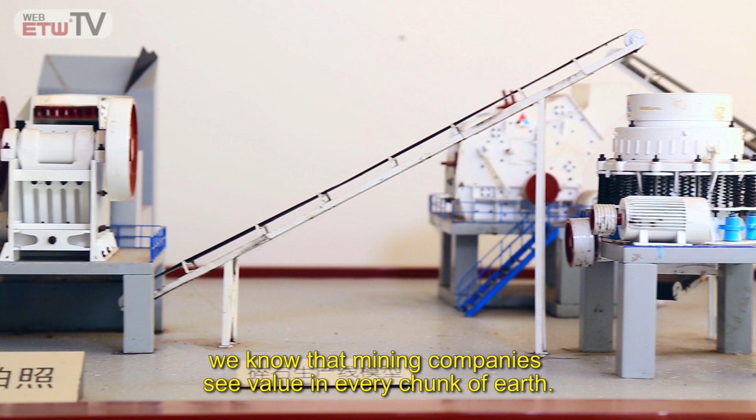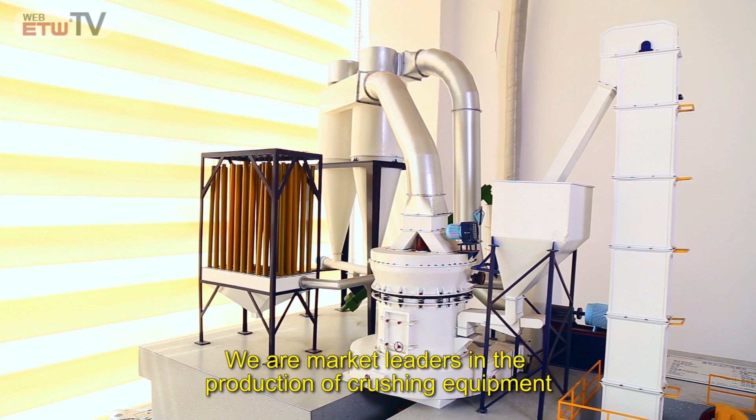At Dingbo Heavy Industry Machinery, we know that mining companies see value in every chunk of earth. That's why we've made it our goal to help you get the most out of your raw materials at the lowest production costs. We are market leaders in the production of crushing equipment and grinding mills in Shanghai.

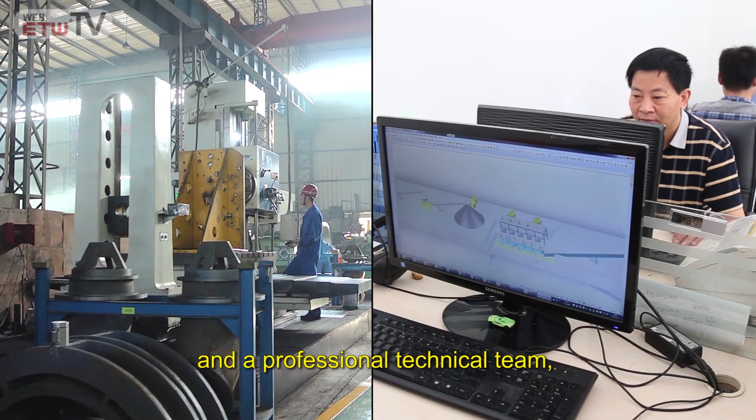With a 230,000 square meter manufacturing facility equipped with state-of-the-art metal cutting machine tools and a professional technical team, we can produce an annual output value of up to $50 million US.

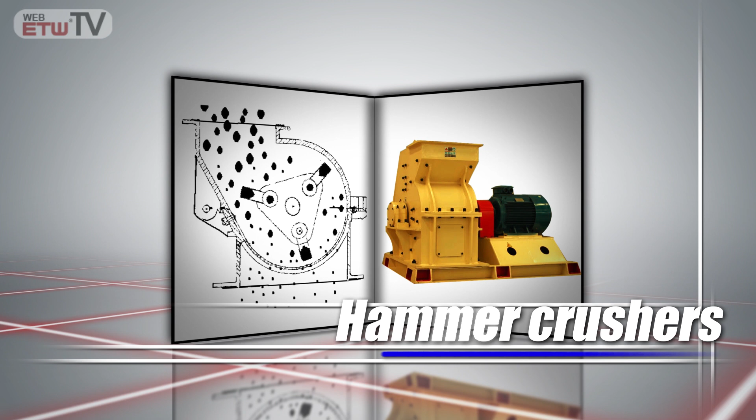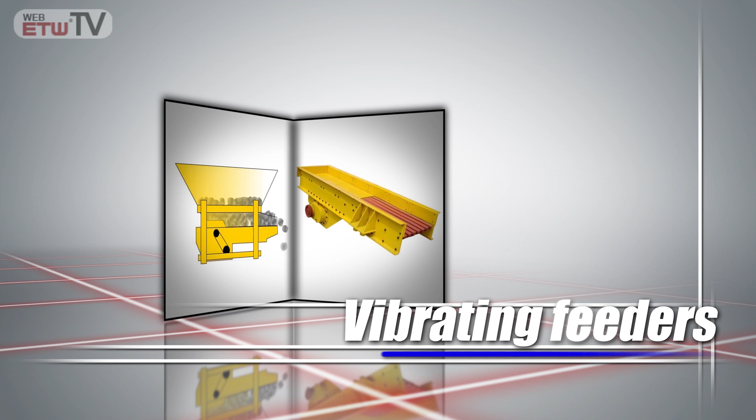Dingbo's product line includes coarse powder mills, jaw crushers, impact crushers, cone crushers, hammer crushers, sand making machines, vibrating screens, vibrating feeders, sand washers, and belt conveyors, among others.

Since 2004, Dingbo has attained both CE and ISO 9001-2000 certification. We have achieved patents for coarse powder mills, reversible fine crushers, roller presses, and other products, but also won the title of Top 10 Grinding Mills in Chinese Industry.

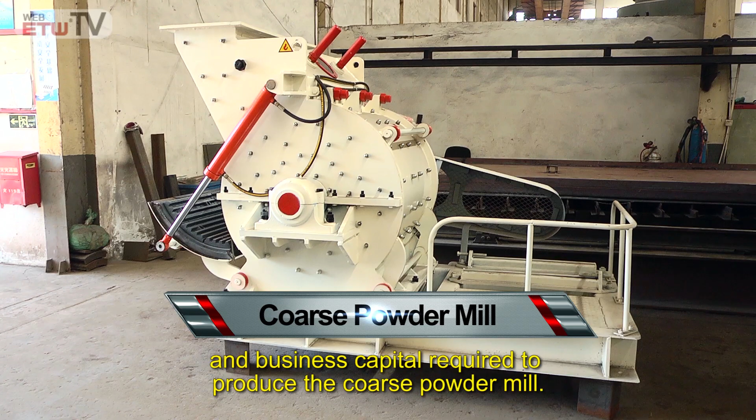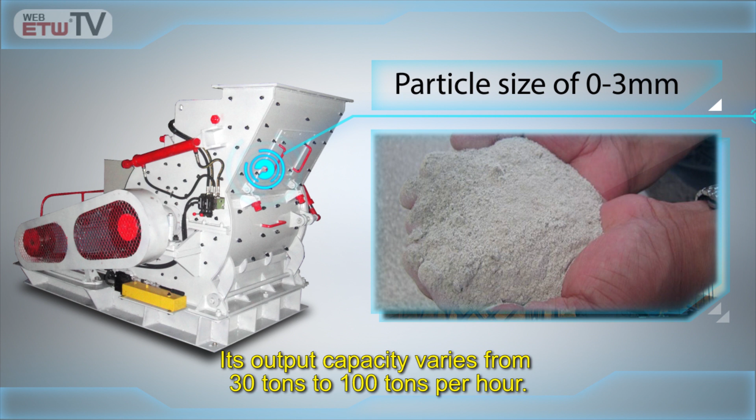In Shanghai, we are the only firm that possesses the technology and business capital required to produce the coarse powder mill. As our patented product, this machine is used for processing coarse powder with a particle size of 0 to 3 millimeters. Its output capacity varies from 30 tons to 100 tons per hour. The entire machine is constructed in full compliance with European standards.

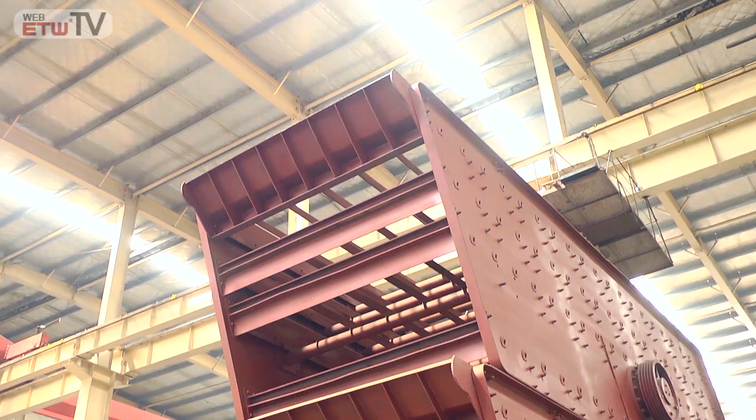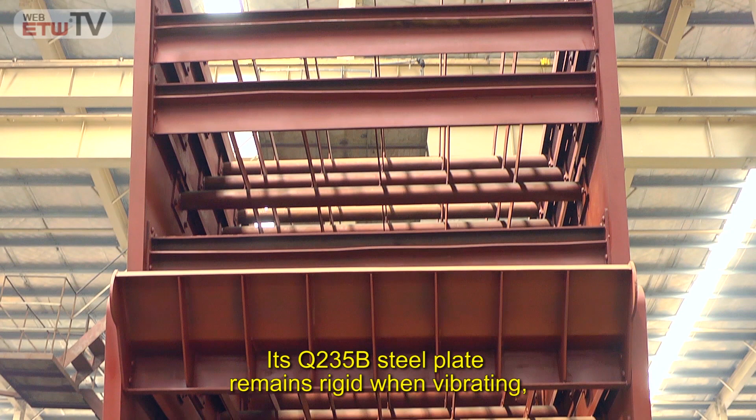Our vibrating screen is equipped with a Siemens motor for stable operation and reduced energy consumption. Its Q235B steel plate remains rigid when vibrating, thus extending the lifespan of our equipment. In addition, this product has been coated 4 times, which provides extremely strong resistance to rust outdoors and also increases its service life.

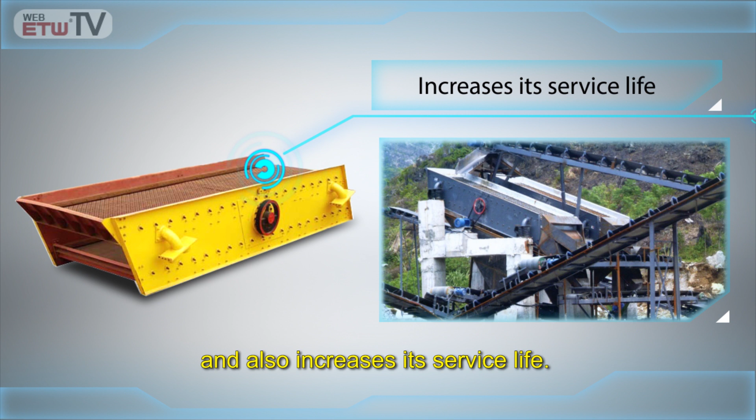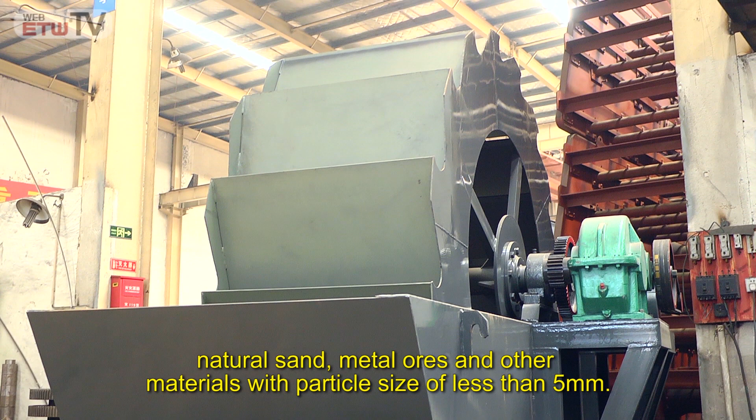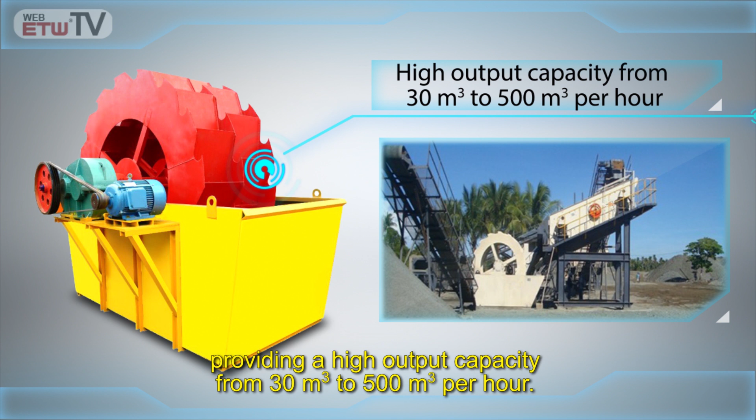The wheel sand washer can perform washing on artificial sand, natural sand, metal ores, and other materials with particle size of less than 5 millimeters. It is mainly used to wash dust, sludge, and so on. This equipment works efficiently, providing a high output capacity from 30 meters cubed to 500 meters cubed per hour.

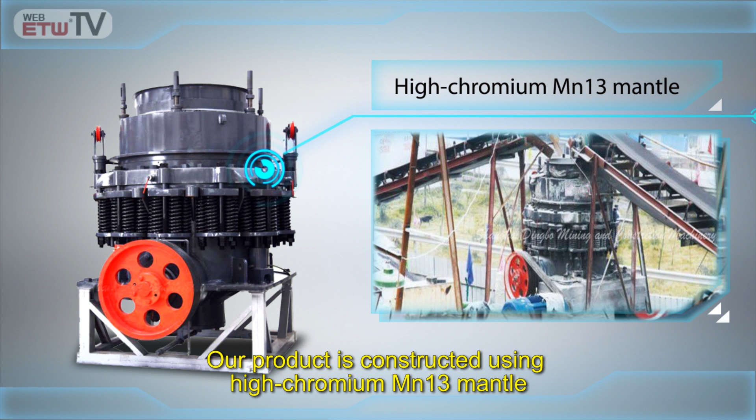This series of machine is mainly used to crush high-hardness rock, ores, and other materials. Its output capacity ranges from 30 tons to 80 tons per hour. Our product is constructed using high chromium Mn13 mantle to achieve an extremely high wear resistance.

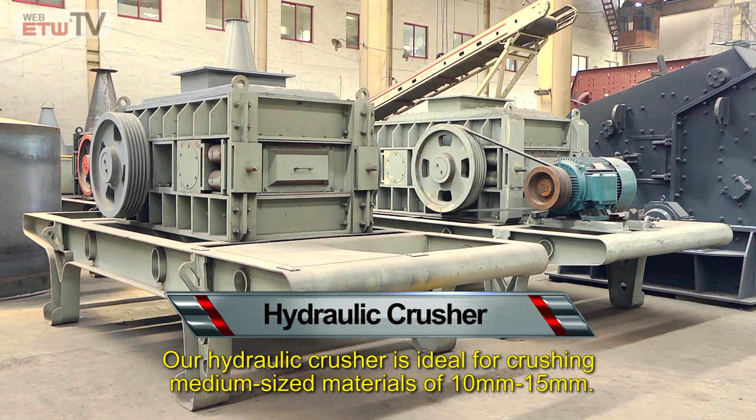Our hydraulic crusher is ideal for crushing medium-sized materials of 10 to 15 millimeters. It allows the size of the discharge gate to be automatically regulated so as to achieve uniform granularity of the finished products. This equipment is usually applied in the secondary crushing process.

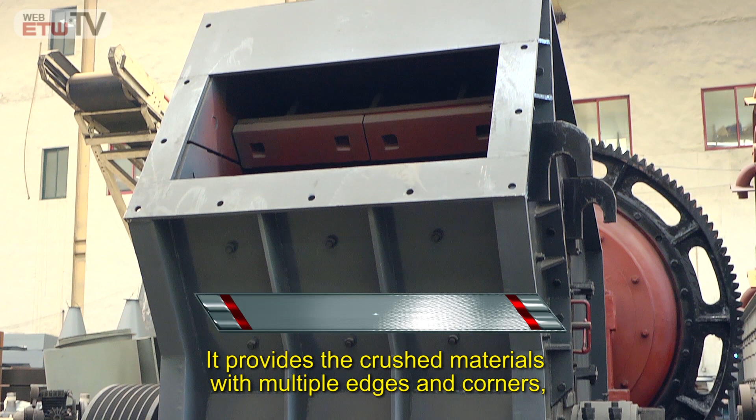It provides the crushed materials with multiple edges and corners, which conforms to the standard for construction of highways, buildings, and bridges, etc. Its rear cover can be opened by a hydraulic device, allowing the worn parts to be conveniently replaced.

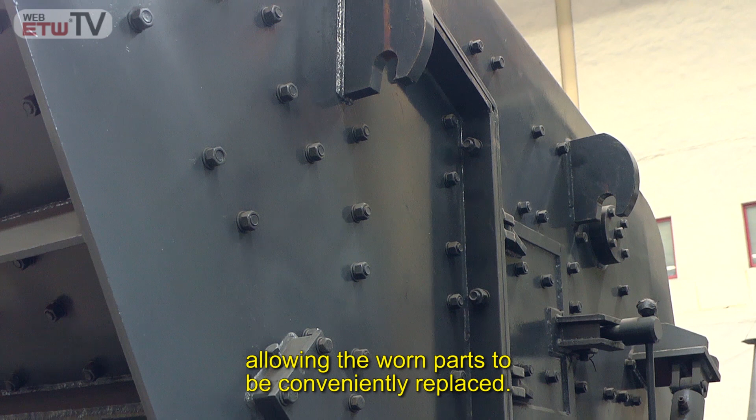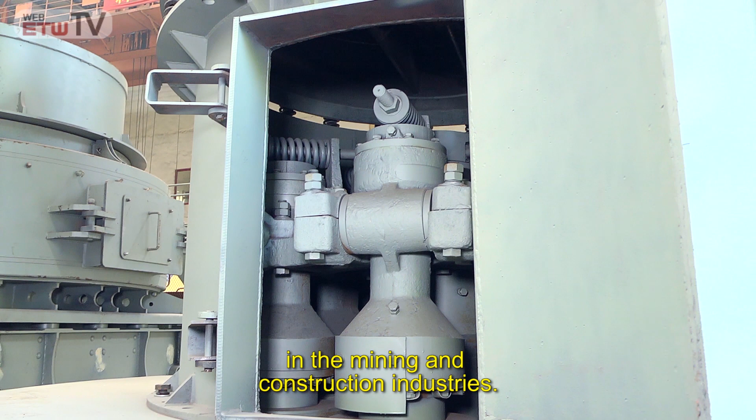The high-pressure suspension mill is suitable for grinding fine and medium-sized powder of 200 meshes to 500 meshes in the mining and construction industries. Its output capacity ranges from 500 kilograms to 30,000 kilograms per hour. Its grinding roll is made of Mn13 materials for a great wear resistance and long service life.

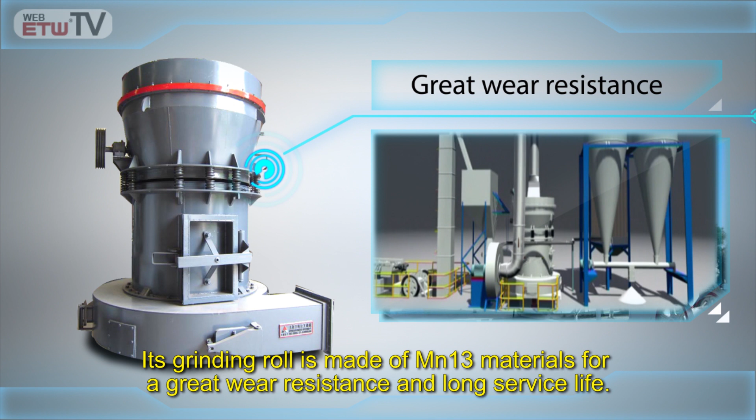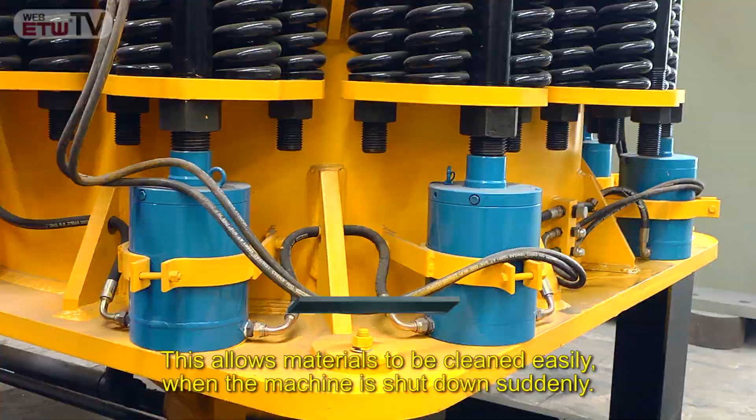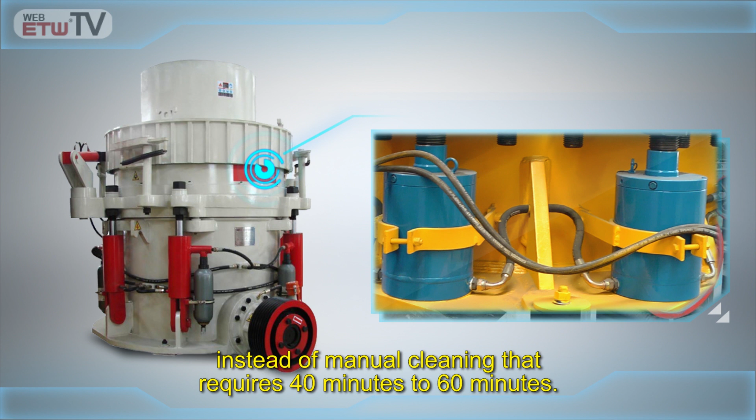Unique to our product is the addition of a hydraulic device. This allows materials to be cleaned easily when the machine is shut down suddenly. It takes only a few minutes for the hydraulic cone crusher to fully complete cleaning operations instead of manual cleaning that requires 40 to 60 minutes. Our machine saves you precious working hours as well as costs.

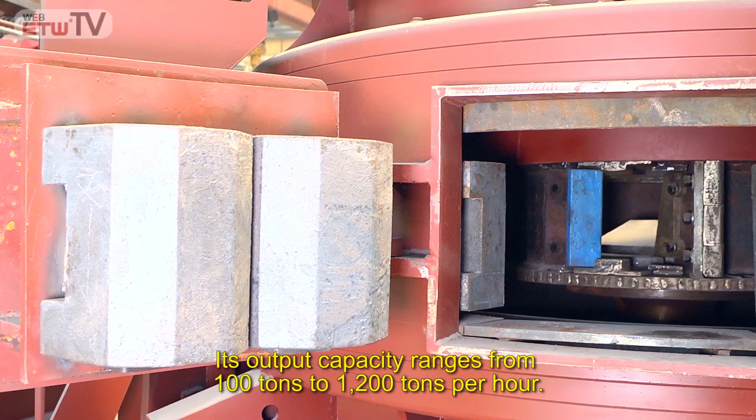The vertical shaft impact crusher is desirable for producing artificial sand with particle size finer than 5 millimeters. Its output capacity ranges from 100 tons to 1,200 tons per hour. In order to increase product life, this machine is manufactured using wear-resistant materials, including an Mn13 hammer and a high chromium alloy tool bit.

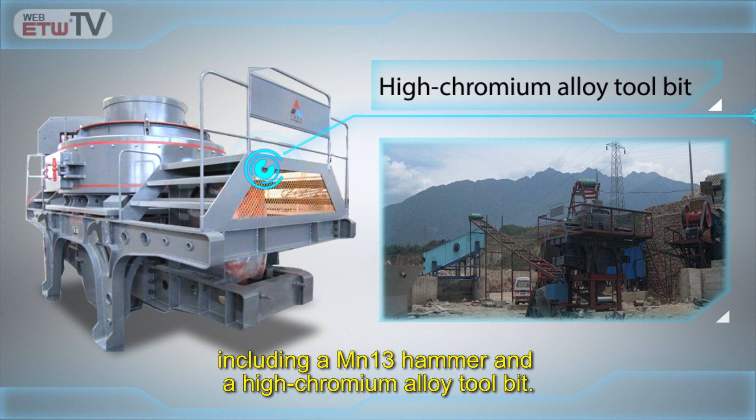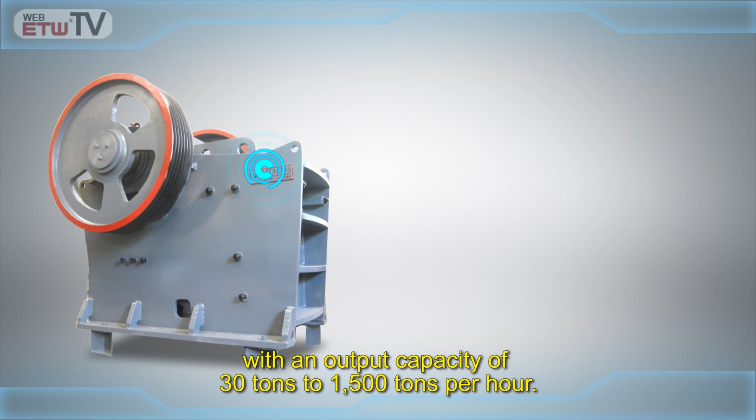The jaw crusher is generally used to break the materials of 300 millimeters to 1,200 millimeters in the primary crushing process with an output capacity of 30 tons to 1,500 tons per hour. It is designed with Mn13 wear parts to extend service life.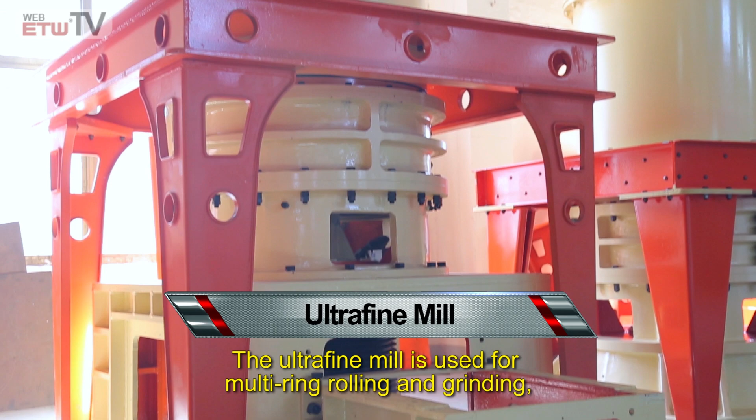The ultrafine mill is used for multi-ring rolling and grinding, which provides the advantages of high efficiency, low energy consumption, and high precision powder selection with particle size up to 5 microns.

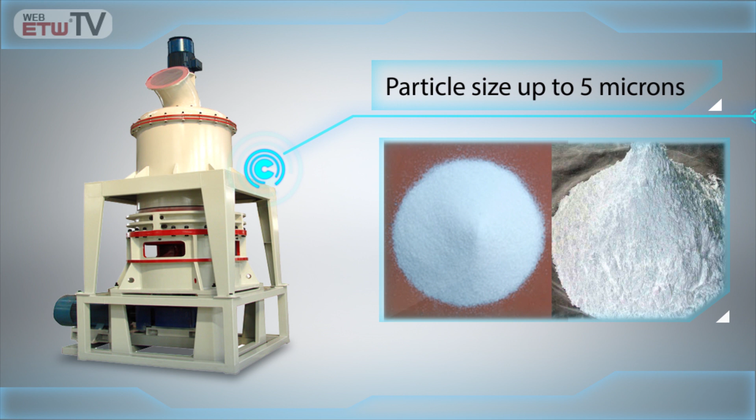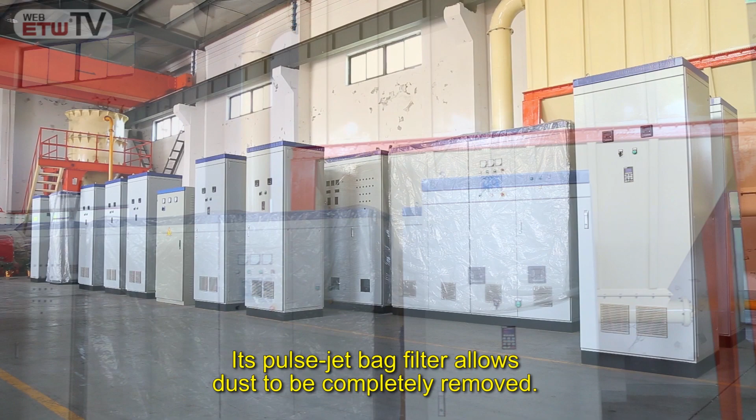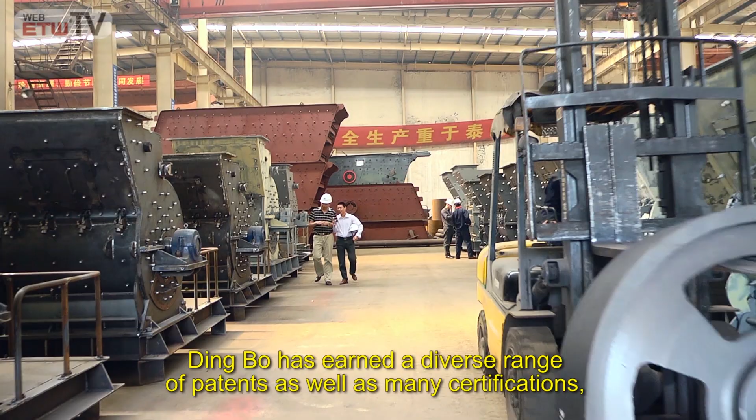Whether your needs are in the mining or construction industries, we have the high-tech machines to enable you to get the job done. Ding Bo has earned a diverse range of patents as well as many certifications, proving we are a market leader that produces state-of-the-art machinery.

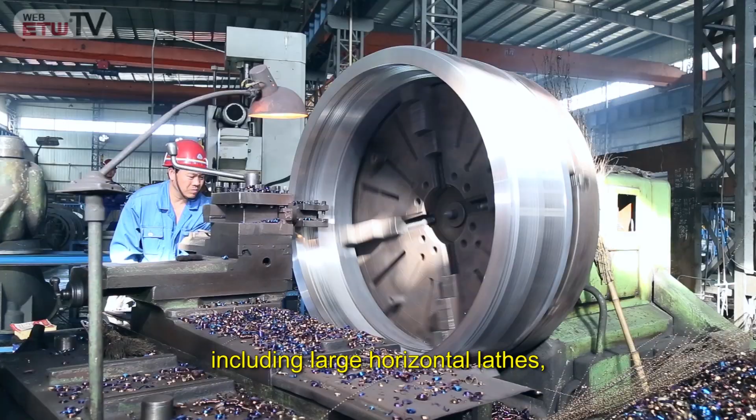Our company has invested in over 30 sets of process equipment, including large horizontal lathes, drilling machines, boring machines, and vertical lathes, etc. Up to 80% of our welding operators have a decade of related experience. Many of our motors are purchased from Siemens brand, allowing the products to run very smooth.

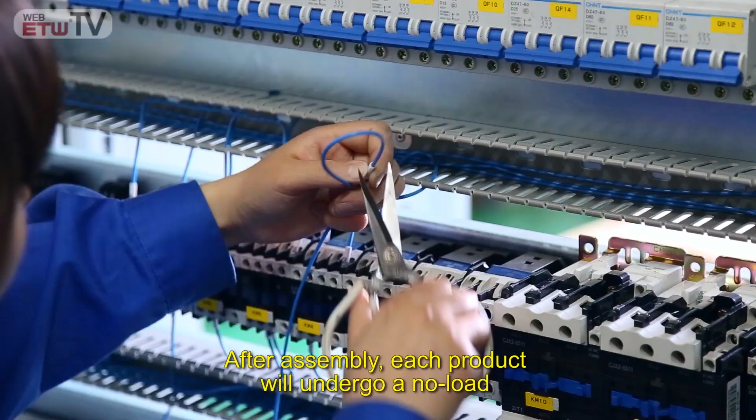After assembly, each product will undergo a no-load commissioning test that lasts for 8 to 20 hours. Only qualified products are allowed to enter the warehouse. We have a robust supply of spare parts to fully meet your needs after sales.